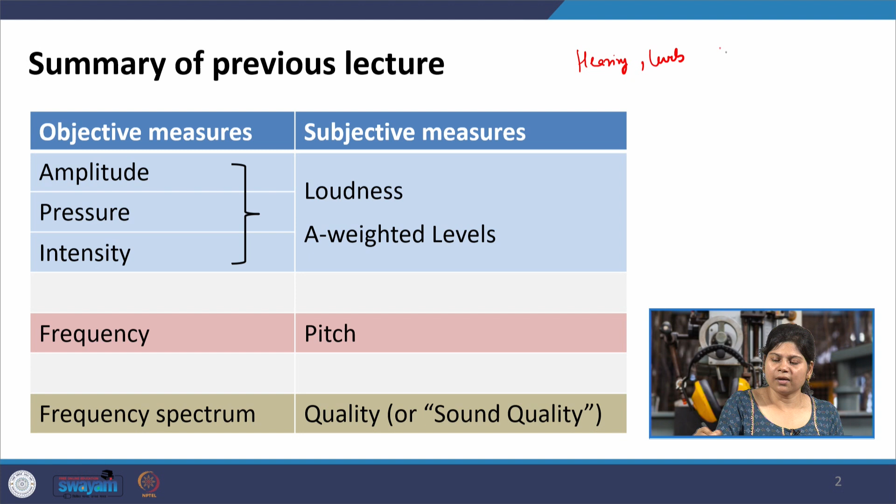Today's lecture is on sound quality. It is a continuation of our previous lecture, which was an introduction to human hearing and the subjective responses to sounds. So, to summarize, the human ear is very subjective in nature and has its own way of perceiving sound, where hearing and levels are dependent both on the pressure as well as the frequency of the sound.

The ear is a very complicated frequency selective device, and there are objective measures and the subjective measures they relate to with respect to how a human responds to sound. The amplitude, pressure, intensity is typically related to the loudness of the sound and the A-weighted levels of the sound, and the frequency is typically related to the pitch,

which is how the human ear perceives the frequency content of the sound. Then the overall time and frequency spectrum gives you how the sound is distributed over time and frequency, which gives you the sound quality. We studied these in the previous lecture. Here we will study sound quality and the process of sound quality engineering, where both subjective and objective tests will be introduced, and we will study psychoacoustics as well.

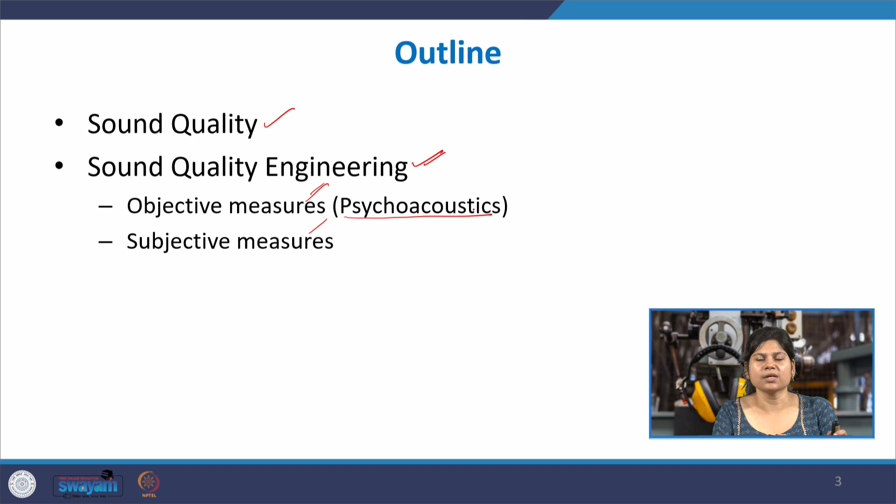So, what is sound quality? As the name suggests, it is the quality of some sound: how good the sound is, how suitable or appropriate the sound is. Sound quality came from market research, and it is closely related to products. Various products give out sound, and you relate the quality of a sound to the product or machinery emitting it. So, usually sound quality is that product's sound quality.

The most accepted definition is that it is a perceptual reaction to the sound of a product that reflects the listener's reaction to how acceptable that sound is for the product. The more acceptable the sound of that product, the greater its sound quality. Overall, product sound quality refers to the suitability or adequacy of the sound of a product.

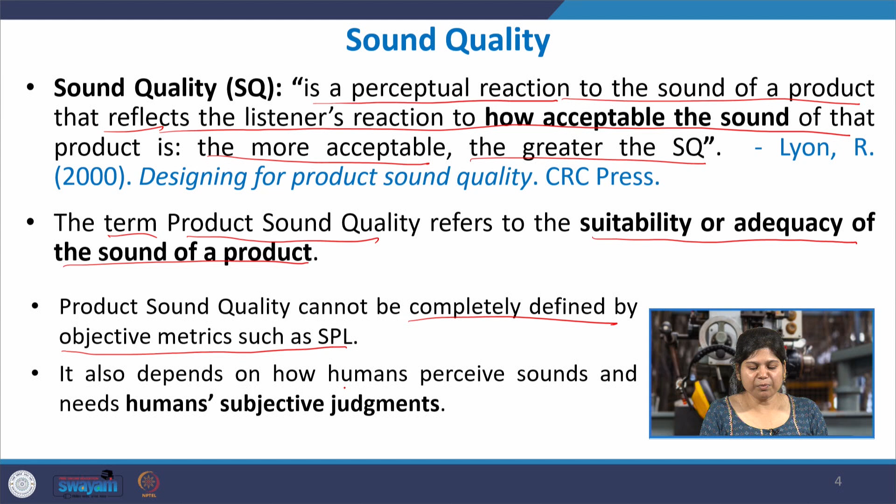It is the human that is judging the sound quality. They say this product has a high sound quality, which means the sound emanating from that particular product is very suitable to that product. So, it is very subjective in nature, human judgment is involved, and hence it does not get completely defined by objective metrics alone, such as the SPL. It also depends on human perception and subjective judgment.

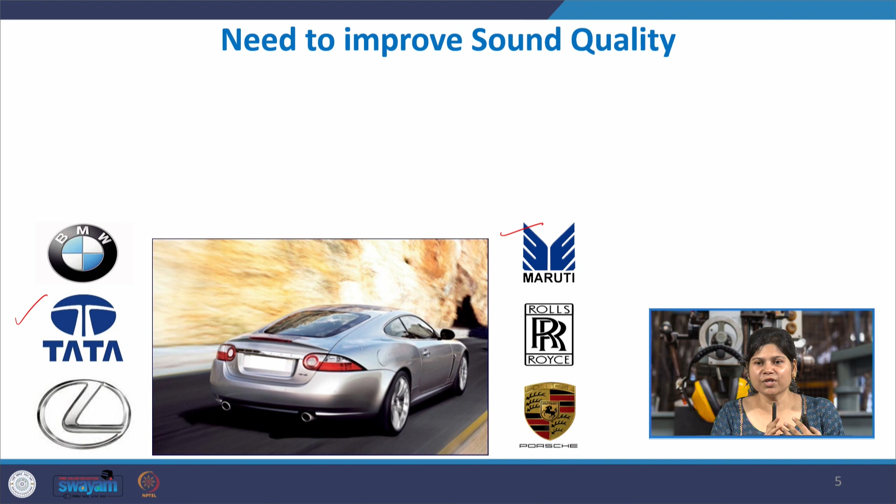Let us say this is the image of a car. This car can be of any brand, Indian brands such as Tata Motors, Maruti, etc., or different international brands. Sound quality plays a major role in the automotive industry. You would have noticed that different cars sound different. When a Ferrari goes by, even if you are not looking, just by the sound of it you will know that a Ferrari is going by.

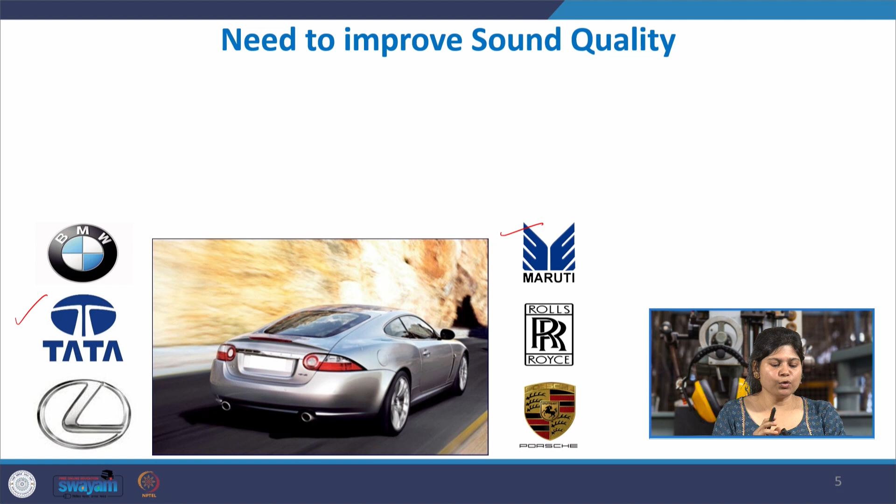In the same way, a Harley Davidson bike has a very unique sound. Even from far away, you can tell by listening that it is a Harley Davidson. Likewise, Bentley, Rolls Royce, Ferraris and various other sports cars and formula racing cars have their unique sound signature. Just by listening you can identify that this is not just a car sound, it is this particular brand's car.

Hence sound quality becomes very important for a manufacturer, because it can become a means to reinforce the image of the brand.

The better, the more suited the sound is to the overall product, or in this case the overall car and its functionality, the higher becomes its sound quality, and hence it improves the overall selling ability of the product.

So, to simplify this, let us say in general you perceive the sports car to be very racy, okay, very loud, racy and fast, and thus when they are moving away, the signature of their sound should also reinforce the same image that you have of that car, the same perception that it should be a racy car, very fast and racy, speedy. So, the sound signature should actually reinforce the same thing. A sports car should not sound like an auto rickshaw, okay, it should not sound like that.

In the same way, suppose you have got, let us say, an electric or e-rickshaw, you do not expect it to sound like a diesel engine, you do not expect it to sound very machiney or mechanic in nature. In the same way, if you have got a very high end premium or luxury car, then you do not expect it to sound like a formula racing car which is very high, racy and speedy sound. It should be more comforting and it should give you a very rich quality.

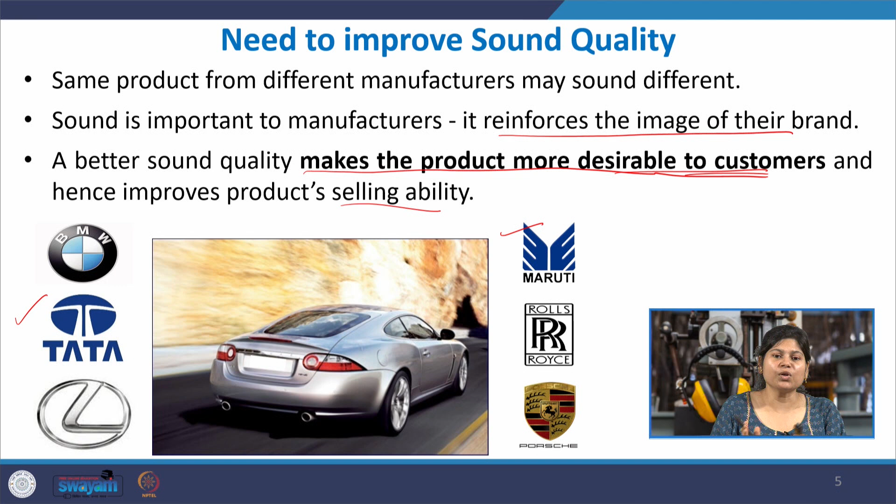It is something very difficult to define, but just by the sound signature of it you should be able to guess that okay, this is a high quality premium car for a very high end customer. So, different brands take special care that the sound signature should be able to reinforce the image they want to give to the consumer. So, here sound reinforces the brand image, and in the same way sound quality is also enhanced so that it can provide the information of the operational conditions of a product.

For example, let us say when you are driving a car, you are closed and there would be interior sounds within the car, and those interior sounds should be able to provide the information of the operational conditions of a car. And not just that, they should be able to enhance the driving experience. So, by that what I mean is that let us say someone is driving a combustion engine vehicle. As soon as you press the ignition key, you hear a very unique sound. Sometimes the drivers just by the sound of it are able to tell the condition of the car, whether the car is running smooth or there is some issue with the engine or some component.

So, as you turn the ignition on, you hear a very specific sound that lets you know that yes, the engine has started and the car is idling. Then as you speed up, from the sound itself you get a feeling that yes, the accelerator is moving, you have pressed the throttle, okay. And sometimes you have some very unusual sound.

Suppose in the same car that you have been driving for many years, suddenly you are able to hear some unexpected sound, like for example some kind of typical gad gad gad or something very different from the usual. Just by the sound of it you can say that there is something wrong with this car, it is not working properly, and then you go and get it fixed. So, the sound here is able to provide you some critical information about the functioning of the car.

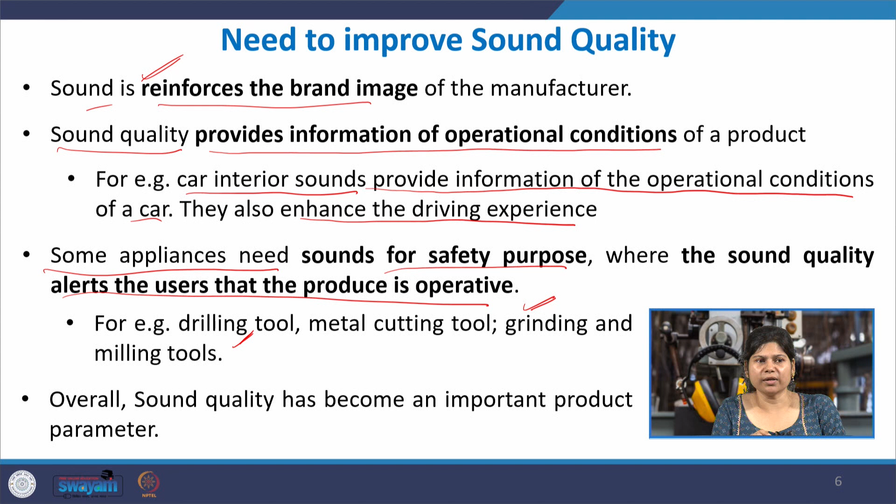We should not be making these machinery quiet, not at least in the current scenario, because they are also alerting the users that you have to stay alert, it is a dangerous machinery that is running. And the same goes for various other dangerous machineries like grinding and milling, where sound becomes very essential to alert the users. So, overall you can say sound quality itself is a very important parameter of a product. Now, what is the process of sound quality engineering?

So, sounds are already inherent and they depend on how it is being generated within that machinery. But sometimes just to make the product more saleable and more appealing to the consumers, the manufacturers are ready to do slight interventions so as to improve the quality of the sound. So, how it works is that whatever product you have, first you make the sound recording. Because sound quality is a subjective judgment, you can have a sample of population listening to that sound and judging it on various parameters.

Then within the software you are calculating some objective metrics, you are doing the correlation, and then if based on the correlation you are able to find that these certain metrics relate to this kind of judgment and I want to improve the quality, maybe I should tweak those metrics, maybe I should make certain interventions, and then the same process repeats. So, let us go to the first step, sound recording.

So, usually for sound quality engineering, binaural recording is done, which is also called dummy head recording. Here you have a mannequin and you are placing the microphones on the two ears of the mannequin. The two microphones have roughly the same spatial separation as the human ears. So, the sound signal reaching one ear for the same source would be different from the sound signal reaching the other ear, because there is a spatial separation between the two points.

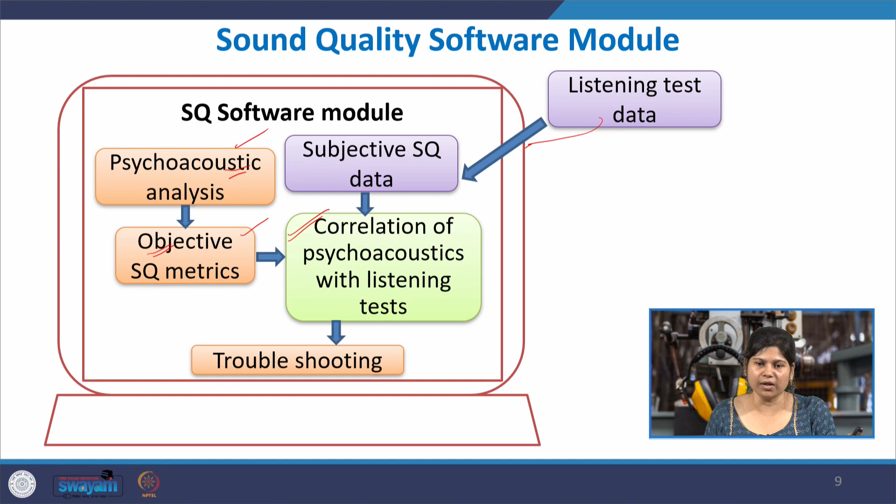So, what are these metrics? These are the psychoacoustic metrics, and psychoacoustic analysis is done to get them. They are obtained by time and frequency domain analysis of sound signals, and they closely relate to the psychological or perceptual responses of humans to the sound. One of these metrics we already saw was loudness. It closely relates to how loud a human ear finds the sound. The other metrics we will see in this class are sharpness, roughness and fluctuation strength. Let us look at them one by one.

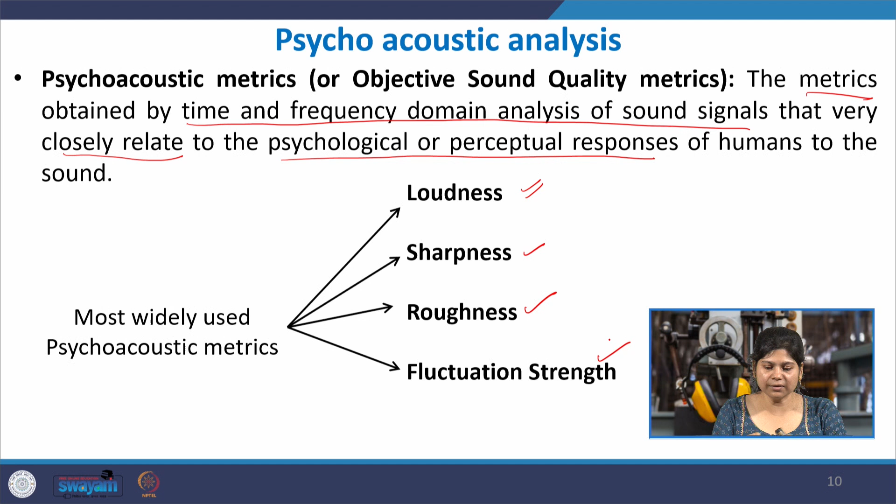Sharpness means the subjective perception of how sharp, or you can say painful or high frequency, that sound is. So, it is basically a comparison of the amount of high frequency content of the sound over the total energy. So, if a sound usually has more high frequency content or a greater proportion of high frequency energy, you call it sharper.

And this is the formulation of calculating sharpness. So, we already saw in the previous lecture how to calculate the loudness in the critical band scale, and N' being the specific loudness curve. So, using the same curve, you apply a frequency dependent weighting function, and you know that the higher the proportion of high frequency content, the sharper is the sound.

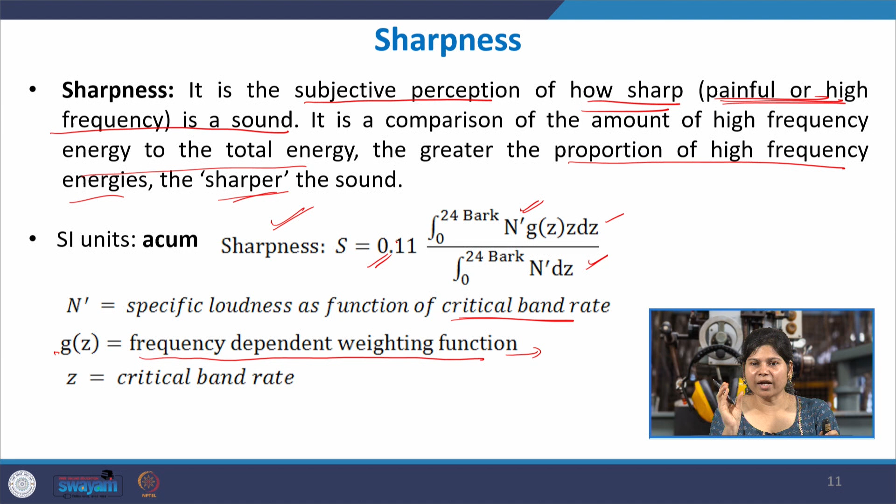So, here this frequency dependent weighting function gives more weightage to the higher frequencies, and low weightage to the low frequencies, and then you apply this weighting to get an altered loudness spectrum or a frequency weighted loudness spectrum. You divide it or normalize it by the total loudness and then multiply it with this factor just to get to a manageable number. You get the sharpness of the sound.

Fluctuation strength means the sensation of the loudness modulations in the low frequencies. Suppose the sound is being modulated like this. There is a phenomenon called masking, which means that suppose you have two waveforms very close together in time, then you cannot discern them as two separate waveforms. If the difference between their time is very close, then to your human ear it sounds like a continuous waveform like this.

So, an example of this could be that suppose you had two machineries, you switched one machinery on, and then after 10 seconds you switch the second machinery on. So, when there is a gap of 10 seconds between the two, you are able to quickly discern that right now only the first machinery has started and then the second one.

But what if you switched one machinery and within a fraction of a second you switched the second machinery on. Although they both started at different times, the difference between the two waveforms was so small that the ear was not able to distinguish between these two temporal distributions, and it sounded as the same waveform, as if both machineries had started together. So, in that way, for the distribution of a modulated sound, you first find out how the human is perceiving it after masking.

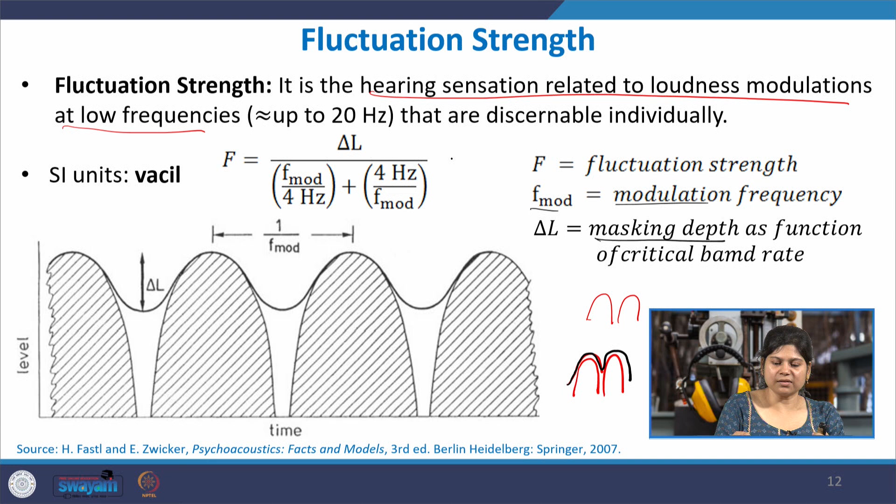So, all of these metrics could be very confusing because they need a lot of complex calculations based on hearing research as well. You first find out, for that waveform, the minimum time interval at which the human ear is able to distinguish between two sounds, and based on that you find the equivalent masked sound level. Then this particular amplitude becomes the masking depth. Then there is some modulation frequency, just like signals with frequency modulation or amplitude modulation. You find the frequency of the modulation, and using this formula you get the fluctuation strength.

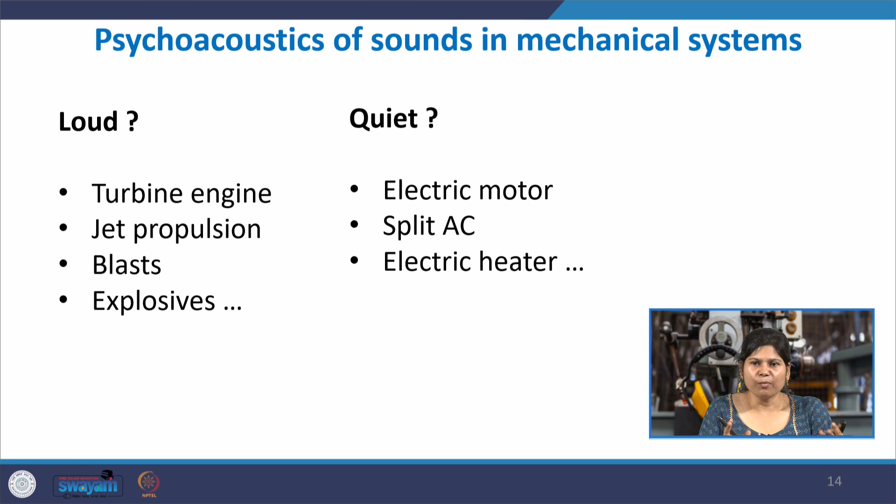Now, let us see an exercise on psychoacoustics of sounds in mechanical systems. Some sounds which typically appear loud to us are a turbine engine and jet propulsion noise; jet noise is very high when you are close by it. Then blasts and explosives appear very loud to us. Some quiet sounds are an electric motor, a split air conditioner, heaters; most electric devices are actually quiet. Then sharp: when you are using a tile cutting machine, it is a very sharp sound, itchy and irritating.

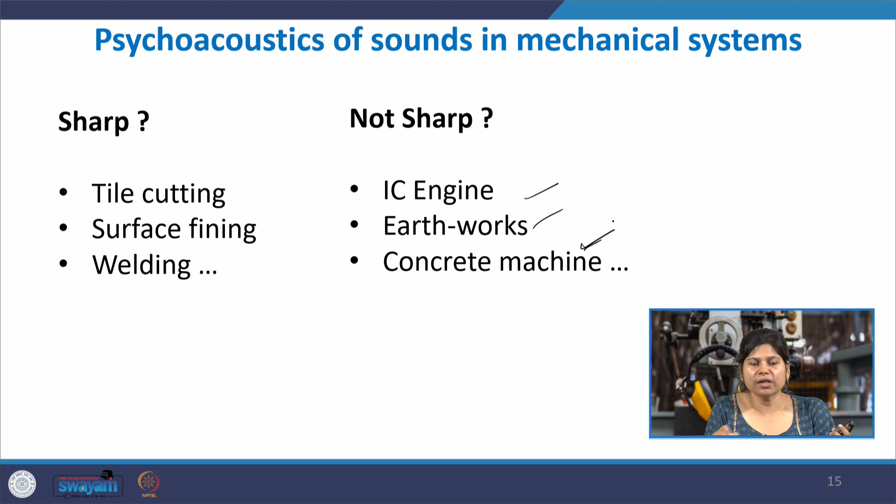Then surface finishing and welding, these kinds of activities typically appear as sharp sounds to a human, and sounds with low sharpness could be something like an IC engine, earth working, concrete machinery and so on. Some sounds which are rough for the human ear are the exhaust noise of a sports car; it is a rough sound and it is made to be that way.

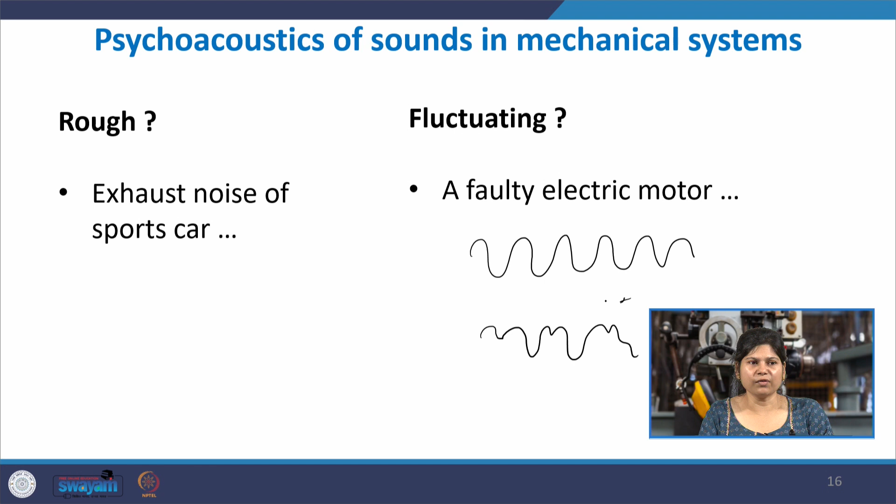Then the fluctuating: you can say a faulty electric motor has a fluctuating quality to it because of the fault inherent in the electric motor. Suppose the motor was having some kind of sinusoidal waveform; due to the faultiness some additional frequencies have come up, and it sounds modulated, and you think of it as a fluctuating noise. So, we have discussed binaural recording, what happens in the sound quality software module.

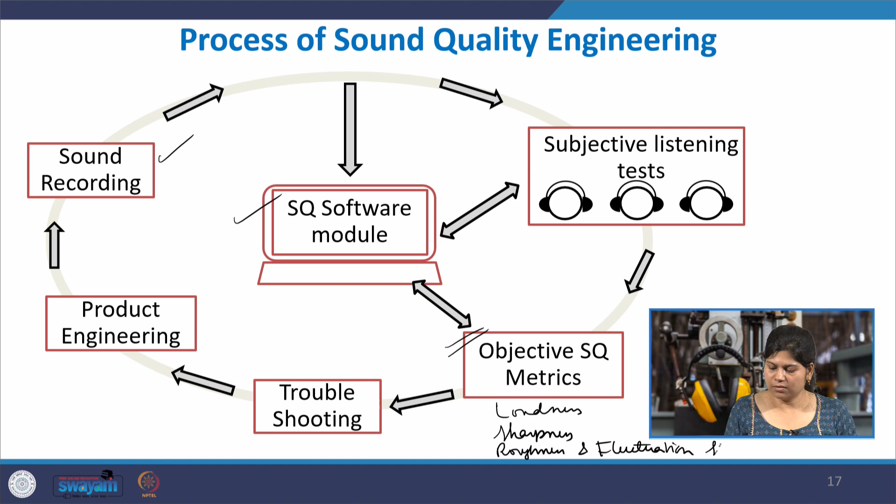So, we have discussed how to obtain these objective sound quality metrics. Now we see how to do these listening tests. Very simple, just play the sounds to the listeners in a closed environment so that they are not disturbed by the outside world and the outside sounds. You play them binaurally because you have recorded them binaurally, so it makes sense to play them again through binaural headphones.

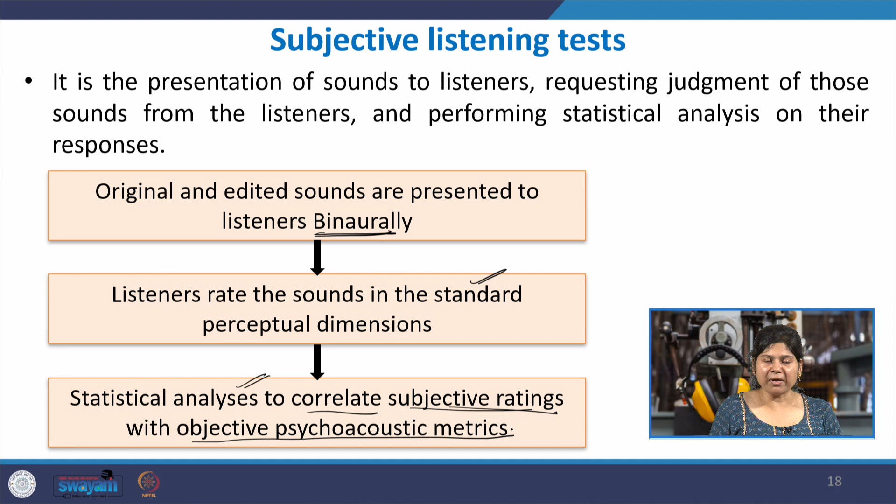Then the listeners will be asked to rate the sounds in some standard perceptual dimensions. You obtain the scores of different sounds; just like people score different products, here they are scoring the different sounds. And then you do the statistical analysis to correlate their subjective scores with the objective psychoacoustic metrics that you calculated in the previous stage. So, how do you collect the perceptual response?

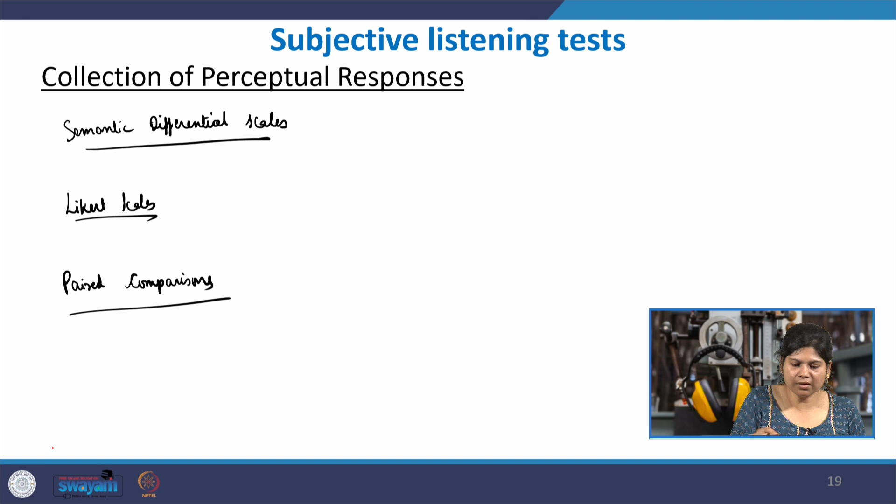You can collect it using some semantic differential scales, or through some Likert scales, through paired comparison, and there are many others, but these are some of the common ones. So, what does it mean? If you see here semantic differential, let us say we are trying to judge the quality of a car, and you ask the listener how powerful this car sounds, and the listener will be rating the powerfulness of this car sound.

And then you can either have a differential scale, which means from 0 to let us say 10, from not powerful at all to completely powerful, and they have to make their own subjective judgment. Or a Likert scale, where you have the scale but you have words on the top like not at all, not much, moderate, quite, very much. So, you can have words to supplement rather than numbers, and then they can rate how powerful: not at all, not much, moderate, quite.

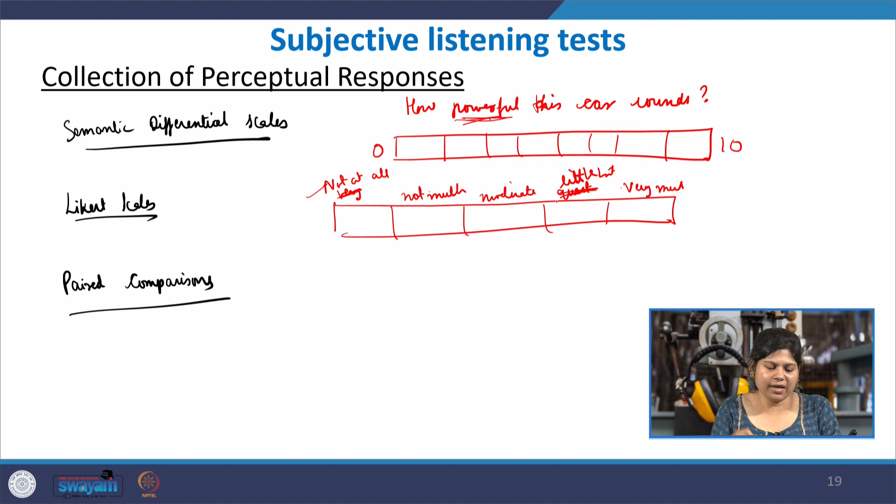Or you can just say this is sound 1, this is sound 2, select the more powerful car sound. So, usually whenever you do subjective listening, the listeners are told what product they are rating, because sound quality essentially boils down to how suitable the sound is to that product. Then they are asked questions like how powerful it is, how pleasant it is, how comforting it is, and various other semantic scales, and they rate it.

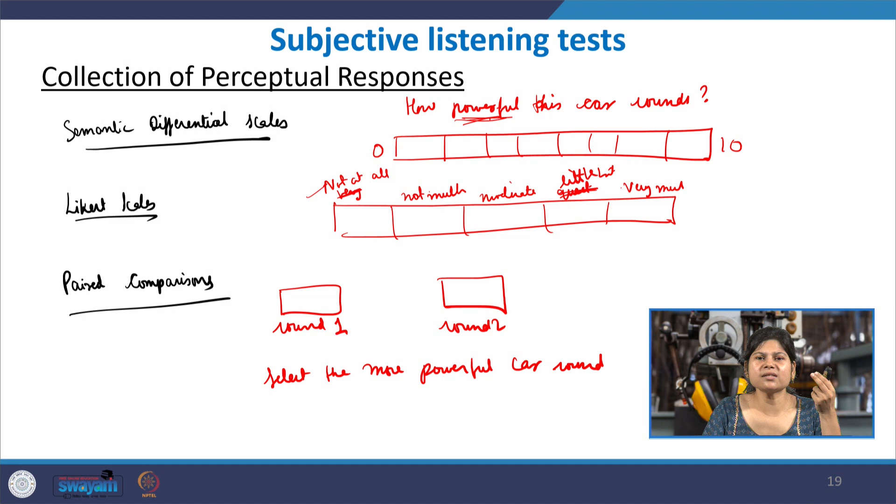And then finally, you do the troubleshooting. To conclude sound quality engineering, you have a product such as this vacuum cleaner. You first do the noise source identification and find the dominant sources of noise. Then you do the sound quality analysis using the steps we described, and you get the objective metrics and the subjective ratings from the listeners: how powerful the vacuum cleaner sounds, how modern it sounds. The manufacturer can decide scales based on what image they want, like powerful, more efficient.

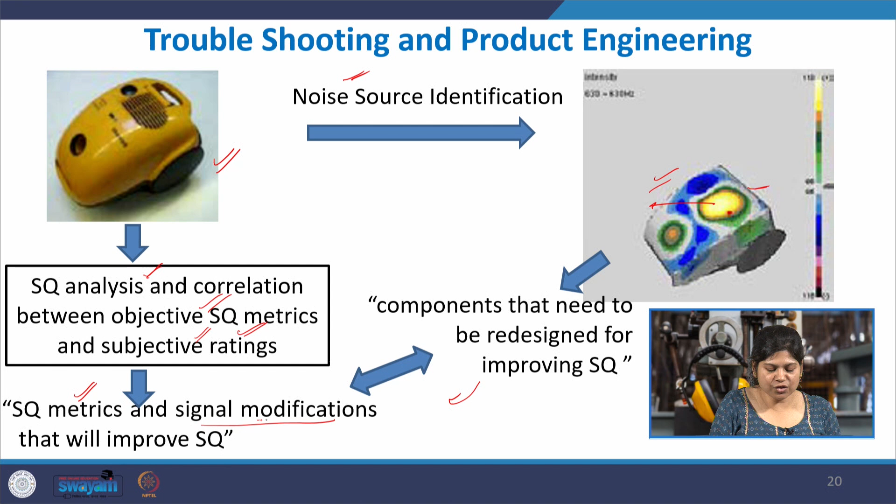So, the consumers can be asked to rate the noise of the different vacuum cleaners, and based on that you can find out that particular sound quality metrics, like sharpness or roughness, are contributing more towards the sound quality. Then you can think, these are the components producing this noise, what redesigning do I need to enhance the sharpness and roughness of this sound, and the product can be redesigned so that the signatures improve and overall sound quality improves.